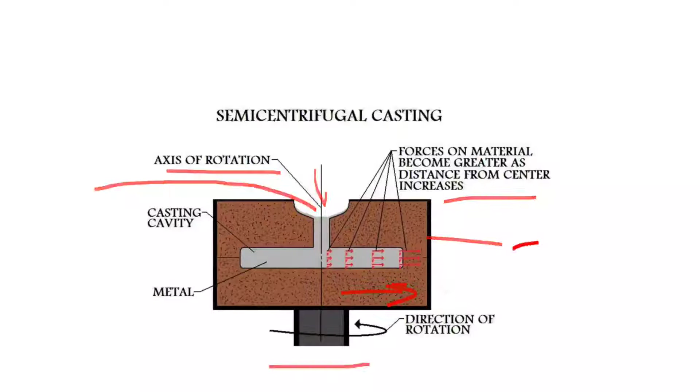This black color is your core. Okay, it is your core. This is your casting cavity. This is your turntable. Turntable. Clear? Here there are some other mechanisms which hold the mold, which are known as mold holding fixtures. Okay, similarly here are the pins.

Okay, these pins hold the drag and cope tightly. So in the exam you can draw this simple diagram as well, or you can follow your textbook diagram. Both are one and the same. So let's focus again on the theory which we are studying.

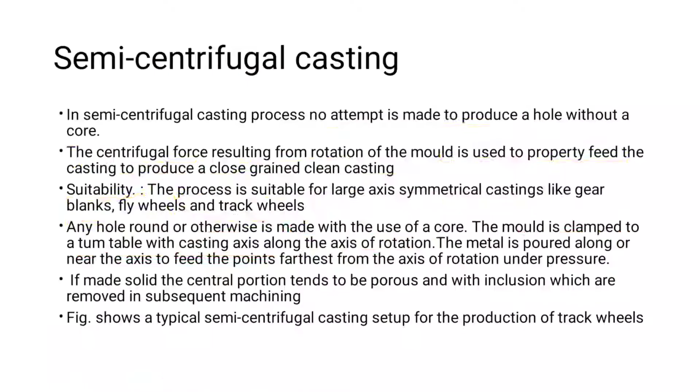So if made of solid, the central portion tends to be porous and with inclusions which are removed in subsequent machining. So the inner portion, that is the center portion, remains porous and can be removed with the help of subsequent machining if there is any defect on the surface, or anything we have not expected in the material. If such type of casting is done, then this can be machined. Okay, machining operation is a finishing operation in casting, so this can be machined.

So the figure shows the semi-centrifugal casting setup for production of a track wheel. We have already seen the figure. This was not for the production of a track wheel, okay, but this is just a simple setup to explain how the semi-centrifugal casting schematic diagram should look. You can draw this easily. Just draw a box, draw a pouring basin, this is a mold, casting cavity, and the direction of rotation of the table you must show. These are the few things you must show in your semi-centrifugal mold diagram. Now let's turn to the limitations of semi-centrifugal casting.

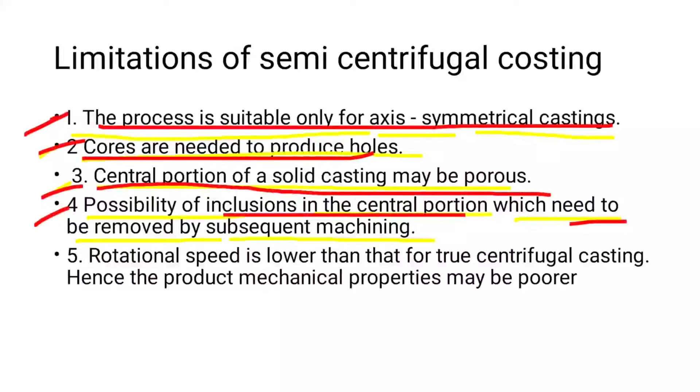Now the fourth point is the possibility of inclusions in the central portion which need to be removed by subsequent machining. There are possibilities for inclusions in the central portion which need to be removed by subsequent machining. So there are pores in the central portions and inclusions in the central portions which lead to defects of the object you are manufacturing. So to prevent failure of the object you are making, what must be done? Subsequent machining should be provided. So points 3 and 4 are the most important limitation points.

Now let's move to the fifth point: rotational speed is lower than that of true centrifugal casting, hence the product mechanical properties may be poorer. In true centrifugal casting, we have seen that the rotation speed is much higher, and we have seen two things. If the rotation speed is low, the material will pour down in vertical and inclined axis true centrifugal casting. But if the rotation speed is too high, it will lead to cracks or rat tails on the outer surface of the casting. So there must be a medium, and there are calculations for the speed of true centrifugal casting.

Similarly, with respect to true centrifugal casting, in semi-centrifugal casting the rotation speed is low as compared to true centrifugal casting, which makes the mechanical properties of the product poorer. Again, an important point in the limitations of semi-centrifugal casting. And this is the diagram which we have already seen.

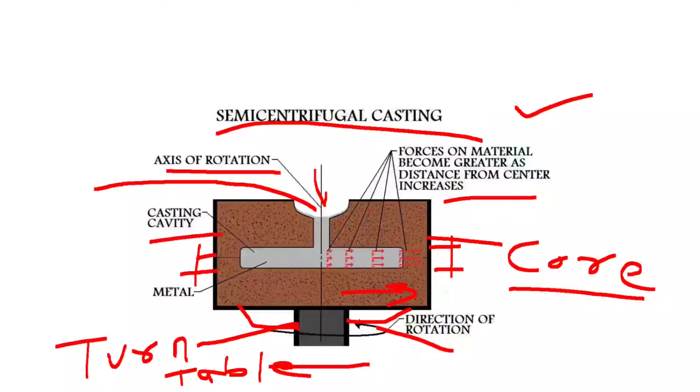So if you are asked to write in short about semi-centrifugal casting, you need to note down these 4 to 5 points which I have marked. First of all, whatever I have starred and marked in red color, you have to remember. These 3 points you have to cover in your answers. Rather than learning the whole sentence, you just have to learn these words. Learn these phrases which I have marked.

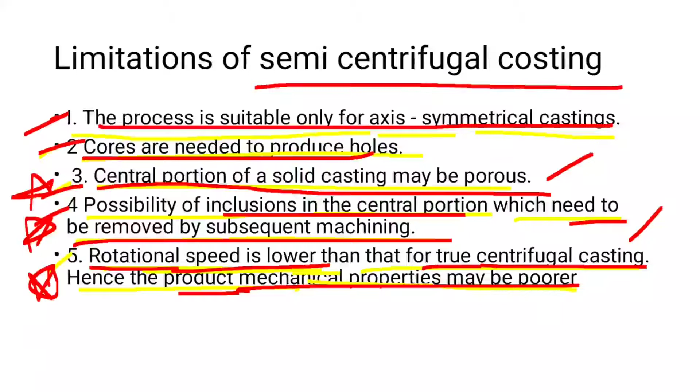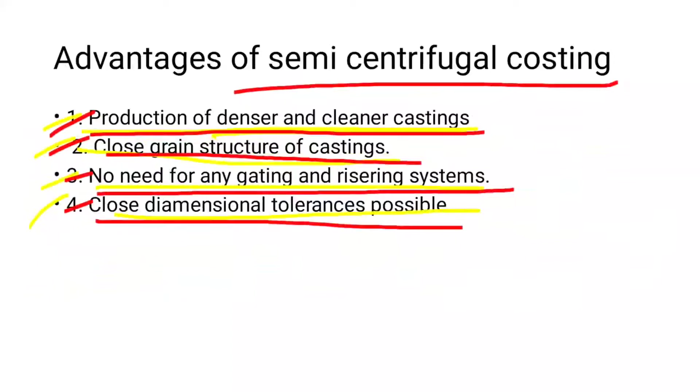Then the advantages we have already covered in the theory also, so you can write 2 or 3 of the advantages easily. And among the limitations, the upper two limitations are also important, but limitations 3, 4 and 5, which I have marked with a star, are the most important. So this is what is important in centrifugal casting, and also the diagram. This can help you score good marks in this topic. So this was all for today's topic.